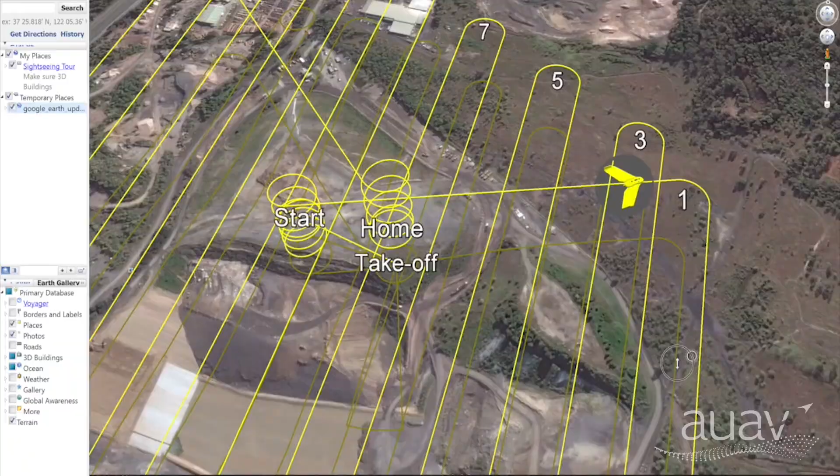AUAV is an award-winning and ISO-certified drone services company, operating throughout Australia and the Pacific region. We provide high-quality mapping and asset inspection data using a wide range of drone systems and related technologies.

With qualified surveyors, civil engineers and drafters on staff, we have a deep understanding of aerial survey and 3D modelling data, with in-house data processing and quality control systems to ensure repeatable and accurate results.

Our fixed-wing drones can cover large areas, and our staff are trained for working in remote locations and challenging conditions, including dealing with our feathered friends.

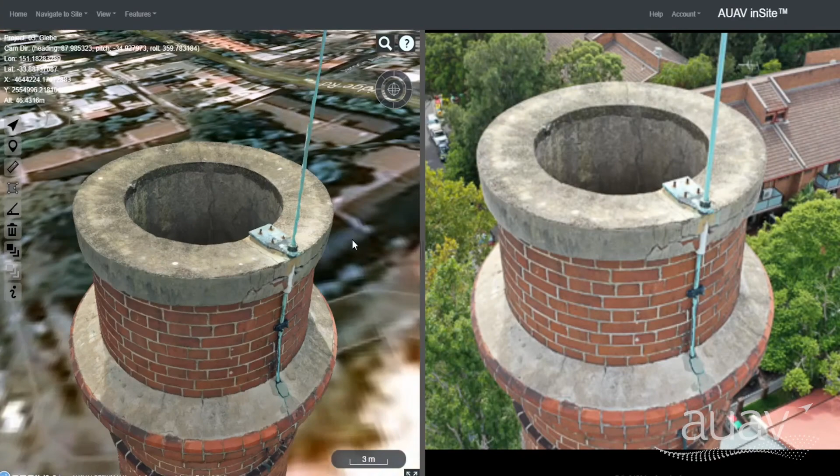Drones have transformed asset inspection, improving efficiency and reducing risk by keeping everyone safely on the ground with an archival record for comparison between inspections.

We've developed our own online software platform for this data, so it can be easily and securely viewed by all stakeholders within the context of a global GIS viewer, including the ability to overlay other data sources or visualize proposed designs in situ for better understanding, faster decision-making, and to monitor throughout construction to ensure everything stays on track.

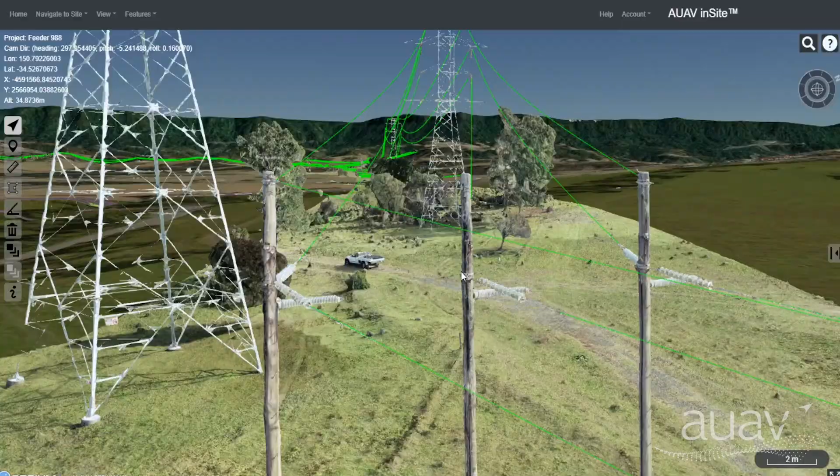inSite is fully customizable to specific needs, such as the work we've done for our telco clients and the power industry. AUAV has developed a unique capability in capturing power infrastructure as a combined survey, asset inspection, and vegetation management dataset, including 3D model, linked photo view, and conductor strings including other line crossings.

Sites are shown in full detail when close up and as a simple location pin as you zoom out, showing both the geographic location and fine details of all assets within the same simple interface.

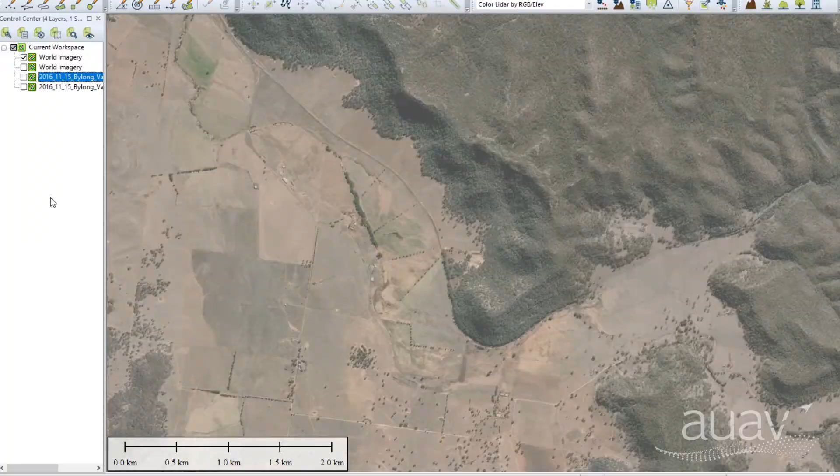We use all sensor types as needed, such as LiDAR, gas sensors, multispectral, and thermal imaging. AUAV can also provide any analysis and reporting services as needed, either in-house or in collaboration with our specialist partners, including cutting-edge AI research.

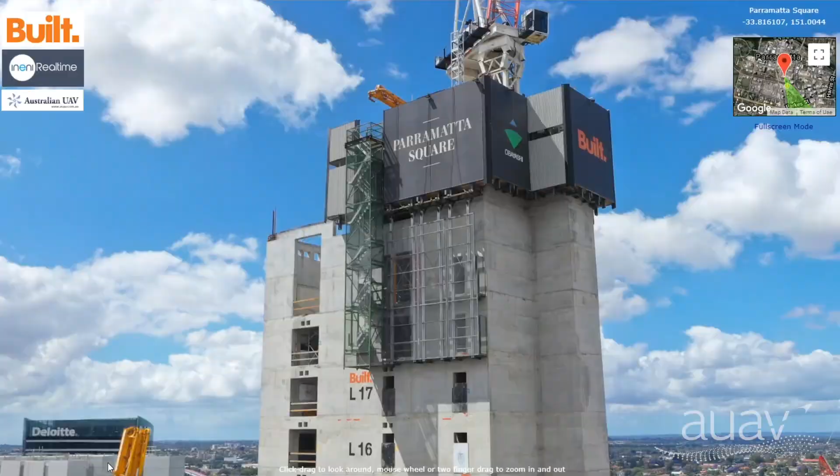Our 360 panoramas allow people to look around for themselves, making a highly interactive and engaging format. This is the perfect way to show off or explore a project, for site safety inductions, or on a regular basis for construction progress monitoring.

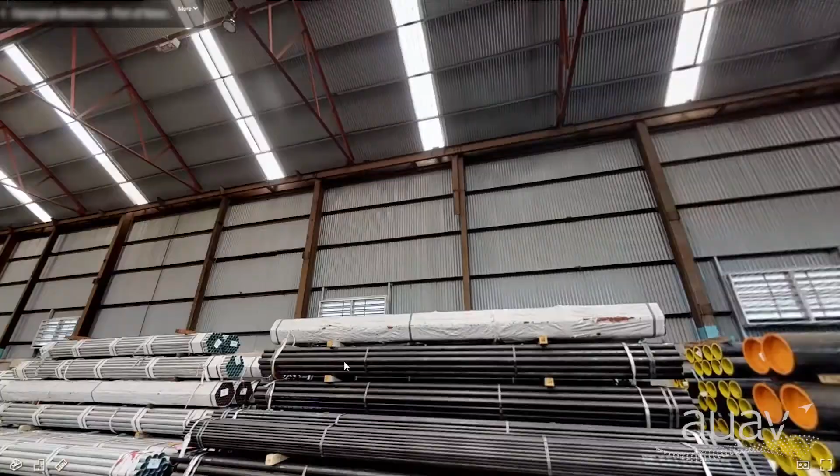We can also provide these indoors for training and site familiarity, as well as condition reporting or as a visual inventory for insurance purposes. Having a complete snapshot both inside and out can avoid the need for multiple teams to visit the site in person.

Roof inspections are a common request, and we can manage the condition inspection and reporting for large-scale property portfolios, reducing those down to a smaller number that we highlight as needing attention. We can capture those either as a simple photo set or as a full 3D model in our online viewer to make annotations and measurements easy.

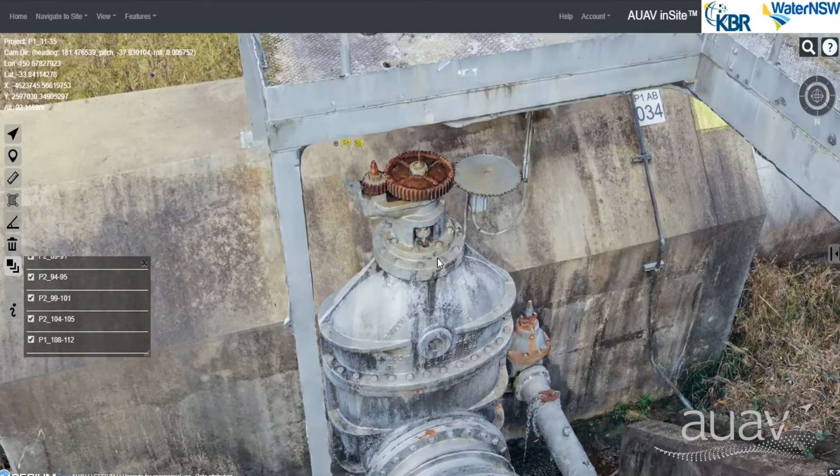Water infrastructure is another of our key sectors, with some of our senior management team coming from that background. Other core sectors for us include coastal survey and geotech, where we provide highly detailed 3D data for cliff, beach, and slope stability. And finally, large area mapping for environmental management.